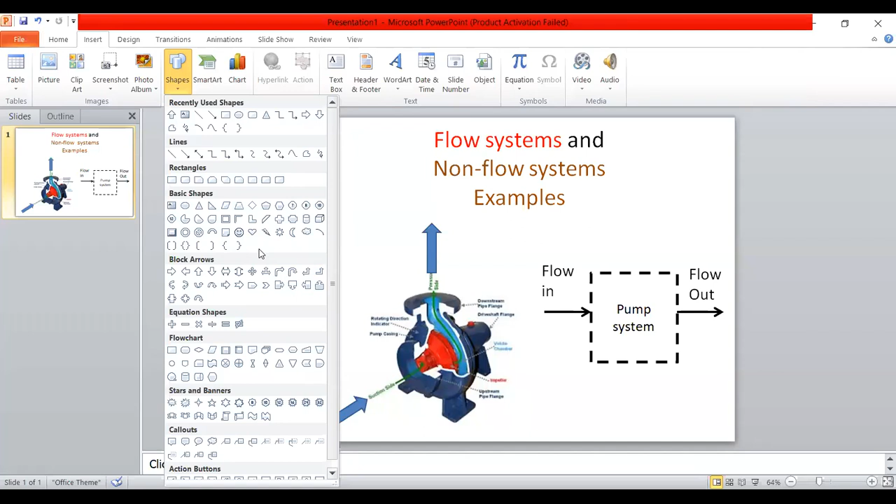Work input here, W in. I think okay, I use the same arrow, same standard. W in, okay, W in. So I just, to organize this, maybe I will put flow in here, okay, flow out here. It's okay, yeah? And this is your W in. So your W in is this. Work, okay, work in, so this is work in means this is the net work.

And you know, generally, so when the pumping is there, there can be heat generation. Okay, there can be even at a minor scale, there can be heat generation. Okay, there can be heat generation. So heat, so let me put it like this. Heat, okay, heat. Okay, so work. Yeah, and this is heat.

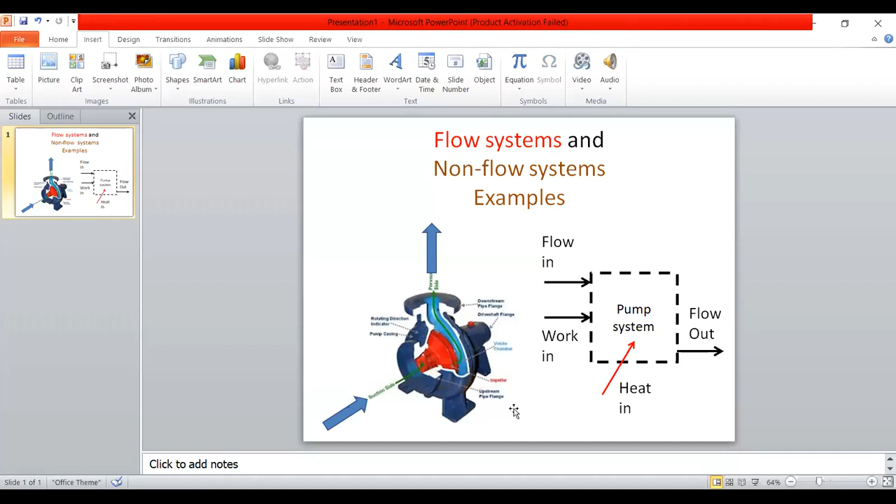Heat. So that is what we call the system. Okay, so you model this, so this is a model. So this is an actual design, right side you will see a model. Okay, so this pump system model, so this is a kind of a physical model, or thermodynamics model, you can say like this.

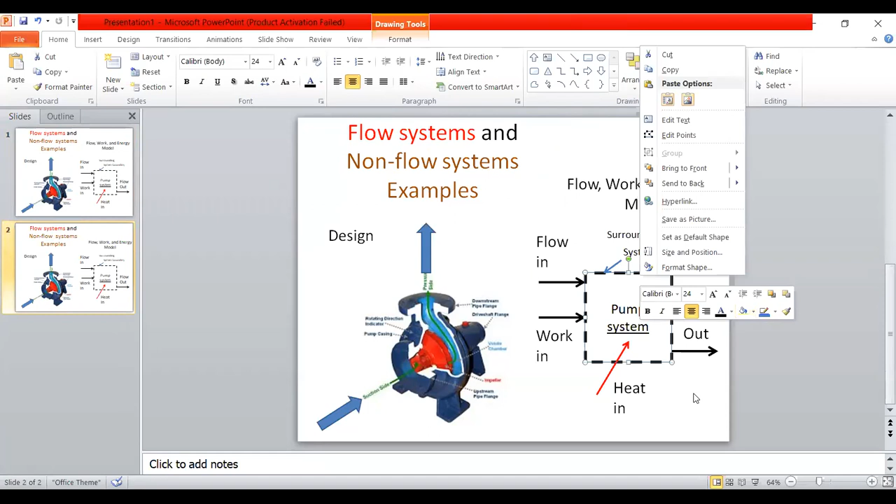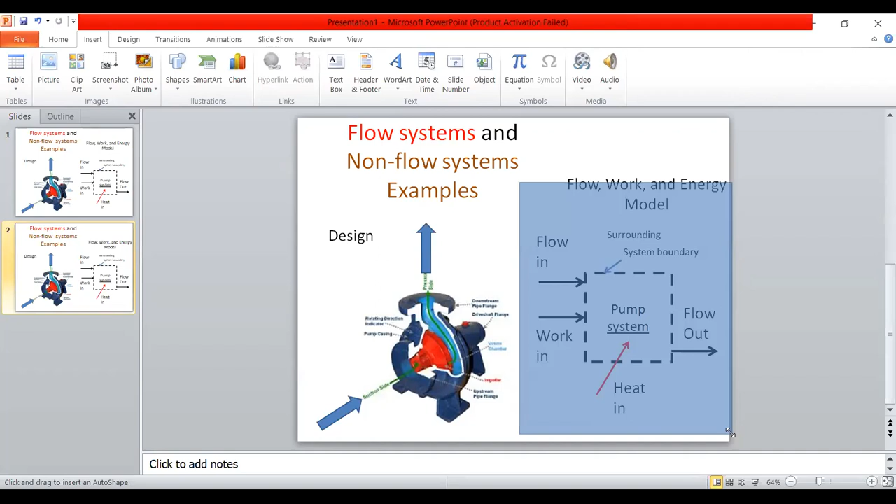So this is an open system or flow system. Let me duplicate this. I'll color the surrounding. Now this looks good, this is the surrounding, this looks perfect.

Flow in is from the surrounding. It can be a piece of pipe, but that is outside the system, it's from the surrounding. Flow out again to the surrounding. Heat in from the surrounding. Work in from the surrounding. So this is the boundary. That's how the system, when you think of the system, it is very important to feel the surrounding as well.

Otherwise, it is not complete. So system means you can think of the surrounding as well, and naturally the surrounding is considered if you think of heat transfer. So there should be two sides. If one side is the system, the other side is considered the surrounding of the system.

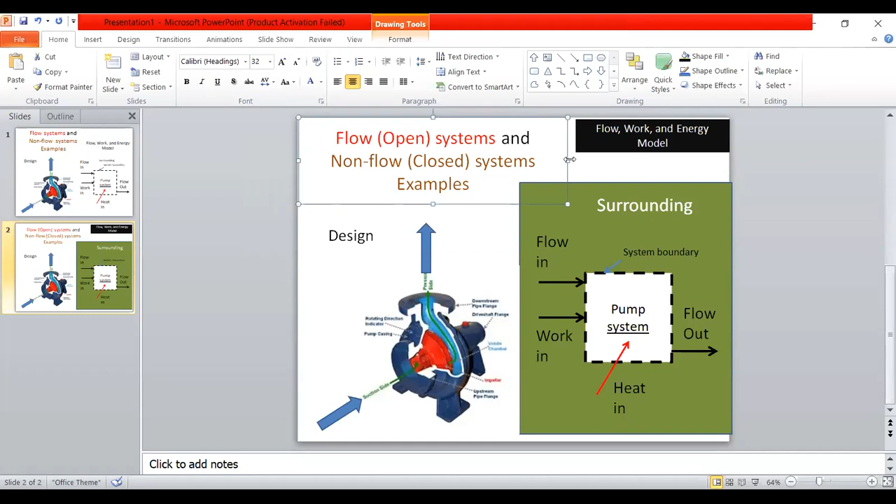Oh, sorry. Yes, good.

Yes, it's a very nice slide. Now here, the flow system example, and we will look for one more example. In future you will be learning the technologies of everything, but of course, step by step. The best is, yeah, Sri Lanka, there are pump makers, there are pump makers, but motors, electric motor makers, I have no idea.

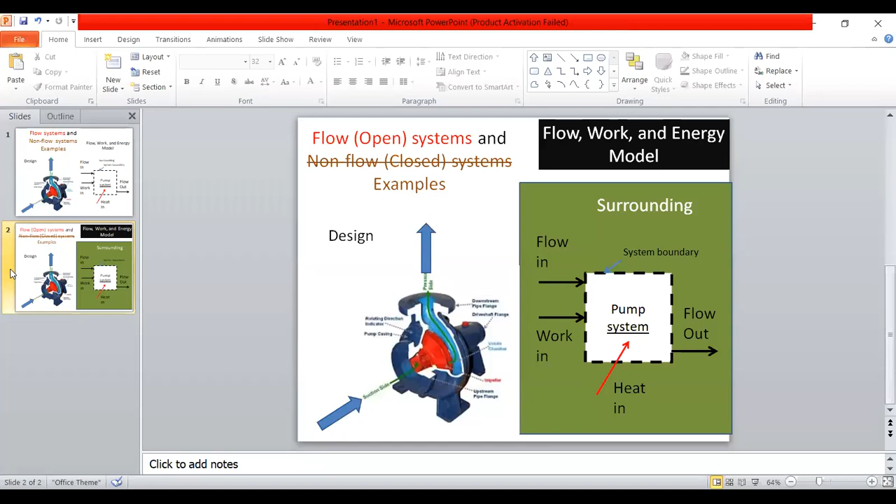There are pump makers, Sri Lankan brands. Let's see, the water pumps, we have one brand, Solex. Solex water pumps. Okay, Vita, yeah, we have one brand. Yes, we have water pumps, but electric motors we are not producing in Sri Lanka.

Maybe. So you can see how you can learn to make the pumps because you can make it. Yeah, okay, you can make it. So it's manufacturing, of course, you have the capabilities. Think about that.

Okay, yeah, and then we will go for another one. Let's say turbine, or compressors. Let's say we will look into compressors. Now these are air compressors. Let me go for a simple one.

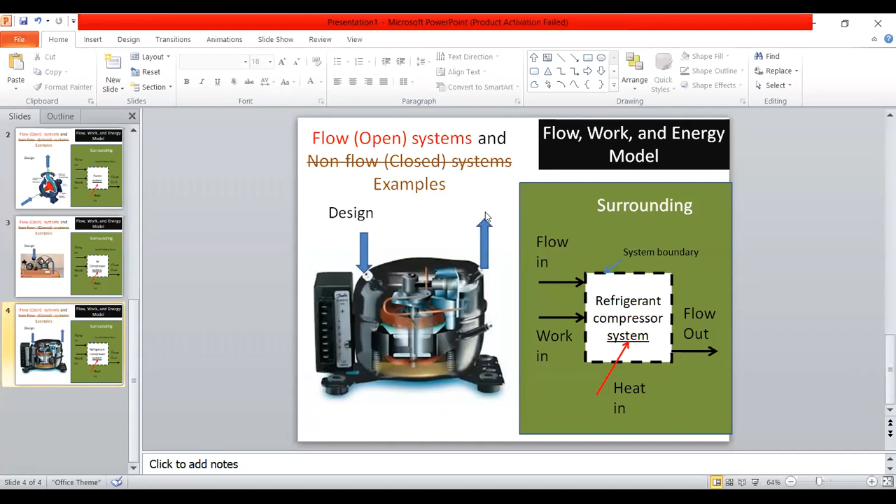So when you model this, it's like this. Again, you can see here. Work done - you can see the electric motor here. Okay, somewhere you will see this. Electric motor is there, and of course that is inside, but system means the piston cylinder is here somewhere. See, you can see somewhere here maybe. So work in is there because of the electric motor. Heat - you can see this compressor is hot when this runs. And even on this leaving side, refrigerant is quite hot that even you cannot touch the pipes. So which means the heat interaction is there as well.

Okay, yeah, so that's how it is. And this shaft, this is the rotor shaft, and oil is seen, so some lubrication is taking place. These are very nice, very precise machine designs. This is with some - this is a Danfoss brand. See Danfoss, this is with some controllers. So some frequency controllers, PLCs, to control the speed with the cooling load. So what you can see is all high tech.

Good, so I have one question not related to thermodynamics, but let's see. Air compressors we can produce here, we have a certain market we can produce, but still to have varieties of products, our market may not be big enough, local market, unless we have exports. The same way, refrigerant compressors - you have to have at least a few millions of units production to sustain this compressor making, at least a few million units production. That's why you can see these compressor makers are generally focusing on big markets. If not, it is not possible to sustain as an industry. You can see compressors made in China, made in Korea.

Maybe you are the one inventing the best one. Okay, so later you can see details of here. How from the steam, the high energy loaded steam, how that working fluid steam can deliver a good work.

Yeah, because the turbines' efficiency are also not 100%. It's around, yeah, we will see efficiency of the turbines. Steam turbine efficiencies.

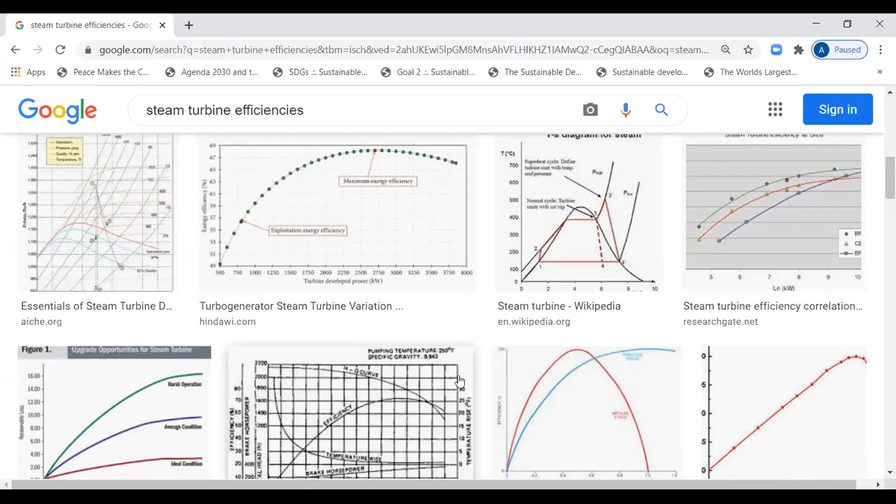Of course, those are the analysis. For the analysis, you have to look into the thermofluid. Steam turbine, so bigger ones have high efficiency. They reach top value up to about 50%, the efficiency.

So this is practical thermal efficiency of a system. Means the thermal energy out of 100, up to what level is delivered as work. That is 50%, 50% is the maximum.

Varies with the turbine size, load condition. And the gap losses means some steam without doing any work just bypasses, because there are clearances. And also friction losses. I think you are familiar with this now.

So they reach top values up to about 50% in 1200 megawatt turbines. In Norochcholai power plant, we have 300 megawatt turbines. How many turbines, how many modules? We have 300 times 3 or 4, so around 1200 megawatts.

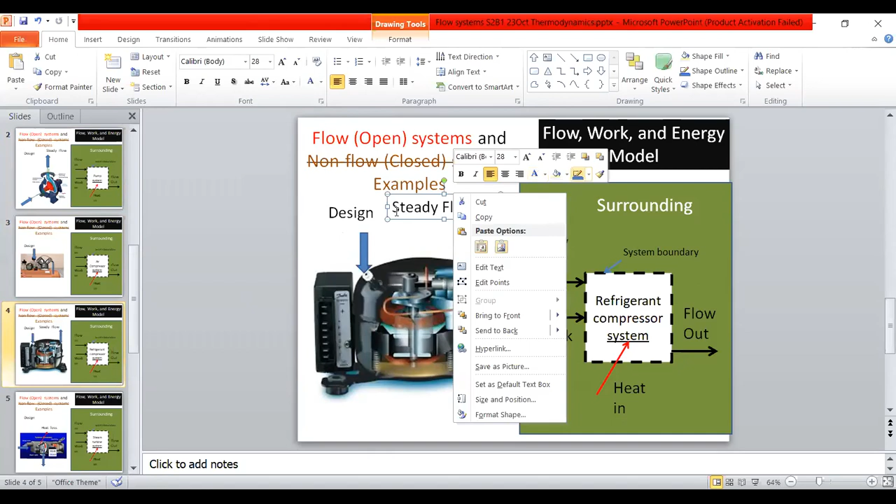I need to mention that for a smooth operation, the flow should be steady. Steady flow is important, because if the flow is not steady, there are issues. So even here, the steady supply is important. But here you can see compressors - let me take this out - not for this, but for this refrigerant compressors, again running in the cyclic operations, steady flow is important, very very important. Because if the flow is unsteady, you cannot have a very good system. Very good long-lasting system is difficult to achieve

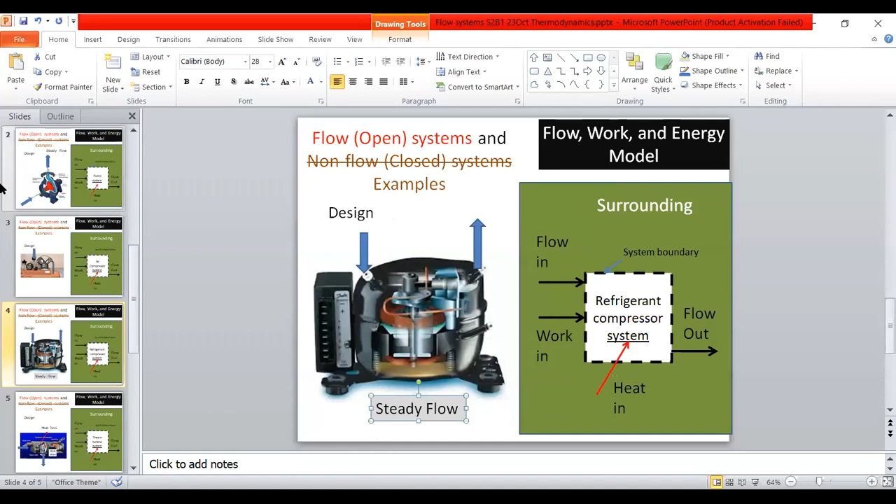if you don't have a steady flow. So the steady flowness is very important, even here, but unsteady situations also you have to analyze. Example like when you commission or when you shut down, so there should be ways of shutting down, there should be ways of restarting this. Even Norochcholai to start took I think a few days, not just one day. So the steady flow is important for smoother operations, and even for our analysis, steady flow is important.

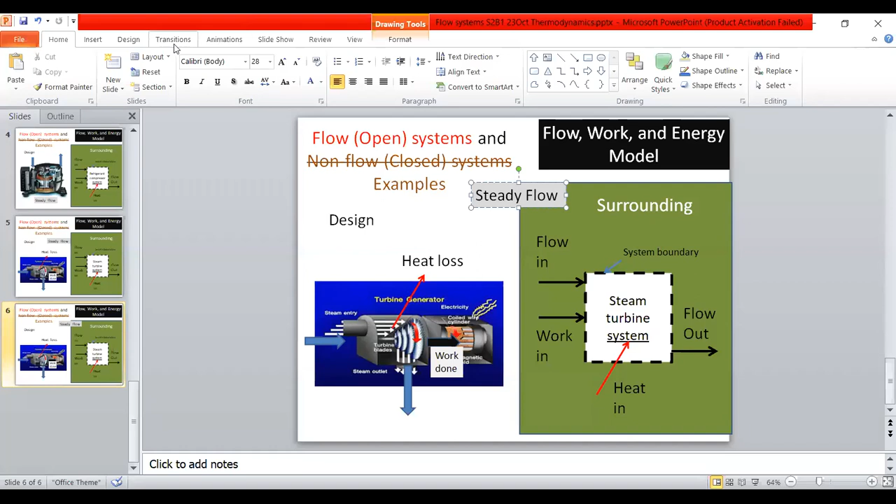So steady flow means, steady flow means what? Steady is a word, but can you feel it better? Steady flow, can you feel the word better, practically? So we can say flow in is equal to flow out. Okay, so that is the steady flow.

Are you satisfied with this? Do you feel that you have to think further on this? Are you satisfied with this? Just to get this information as knowledge of how you can feel this steady flow, that's why. So flow in equals flow out. So to further it, I would say mass - the quantity of matter flow in is the quantity of matter flow out, mass. Because flow is something matter, or mass in equals out.

So in equals out is important, because if not, within the system there is a mass, and the system mass varies. When the system mass varies, there can be issues. Then this is the steady flow condition. You can imagine a big steam turbine running - mass flow in is mass flow out. Anything short on mass flow in, if short on mass flow out, we have issues maybe. Mass flow out less, mass flow in more, there can be some other issues like pressurizing and the operational and even safety issues maybe. So the in and out has certain balances, it's a balance.

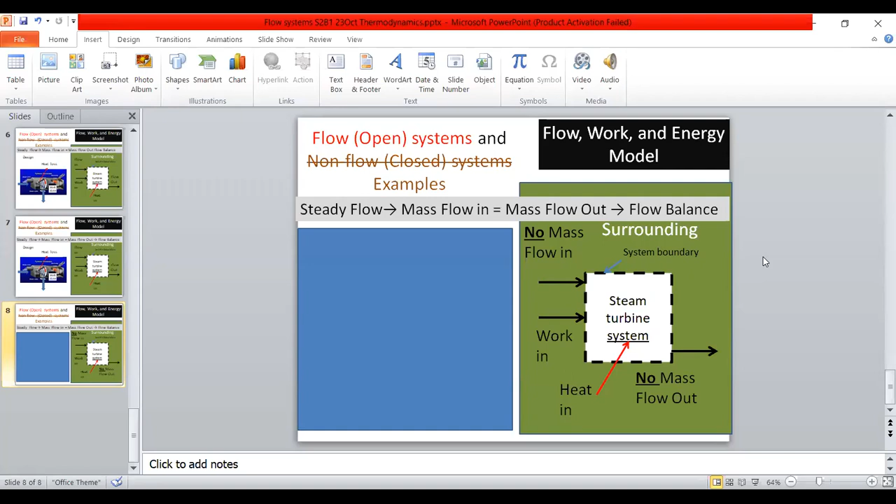Okay, so now, not about the open systems, but non-flow closed systems. So no mass flow in, no mass flow out. It's a kind of balance again. A balance. Again, it's a balance.

Mass flow balancing in a different way. No flow, that's it. Okay. No flow. It's a mass flow balance, kind of mass flow balance. No flow. Earlier one you have flow, but here no flow. No mass flow balance.

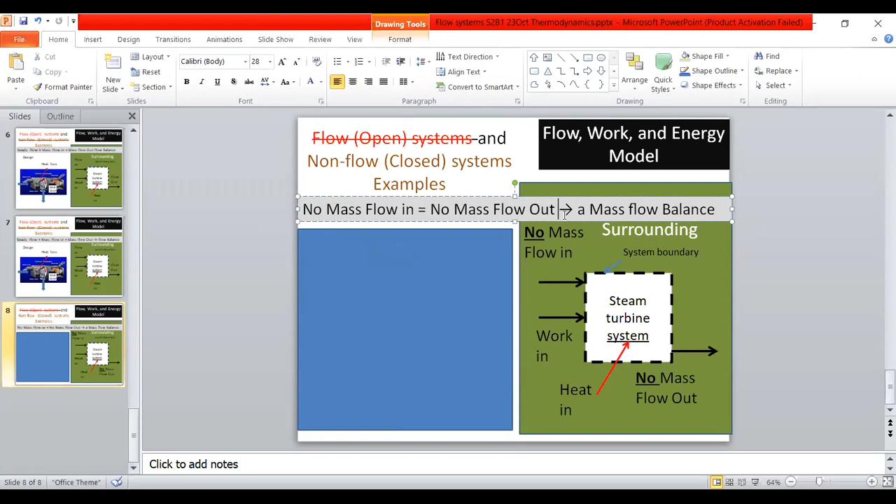Now let's say we have issues. We have issues. Example here. I open this. If no flow,

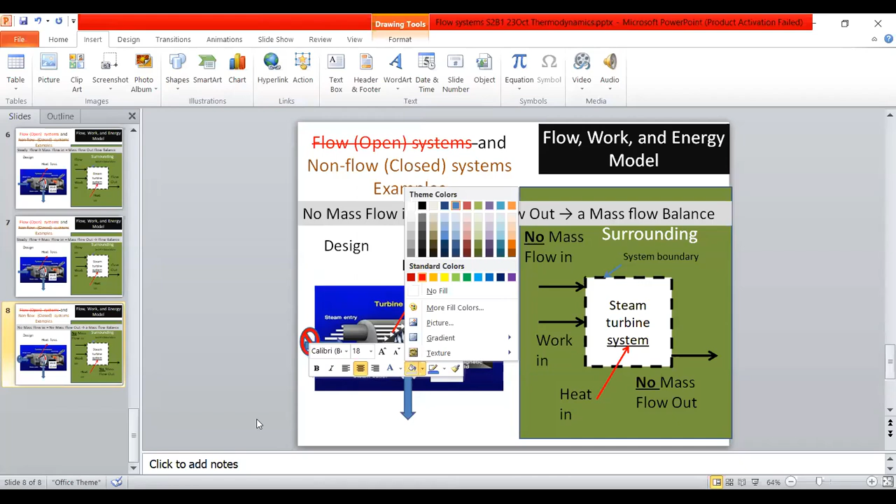no, this is the symbol. If no flow, okay, if no flow, technically, no outflow as well.

Then what happens for this case? In an open system, when there is no flow, no function. For open systems, no flow, no function. Because no work done then.

No work done. Also, no heat loss. This is a dead system, or sleeping system. So, in that case, this is not about the balance, but this is situation. Okay, this is not operating.

Yeah. But there can be systems. So this is like a dead system. There are no steam in, no steam out, no work done, no heat loss. This is like dead. This is not life. Not to say dead, but this is not life. This is not came into life.

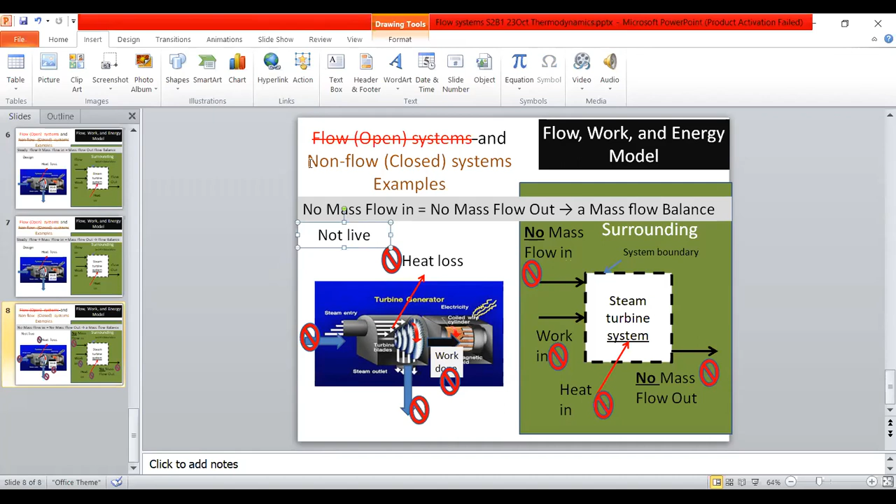No heat, no flow in, no flow out, no work in. So this is something like, how to say? So for open system, this is like not live. Well, this is not live. So I will take this out here.

This is for flow open systems, but there are closed systems with no mass in and out, but very much life. There are systems. Okay, let's see.

Now I'm going to look into, you know this situation. Yeah, you know this situation. So very nice practical aspects. For open systems, there should be a flow. Okay, there should be a flow. Okay, let's say

we will get closed system. Example. Are there live closed systems? Are there live closed systems? Yeah. Open system, when closed, it's not live. Means no flow in, no flow out. Okay, let's say example, kettle. Kettle.

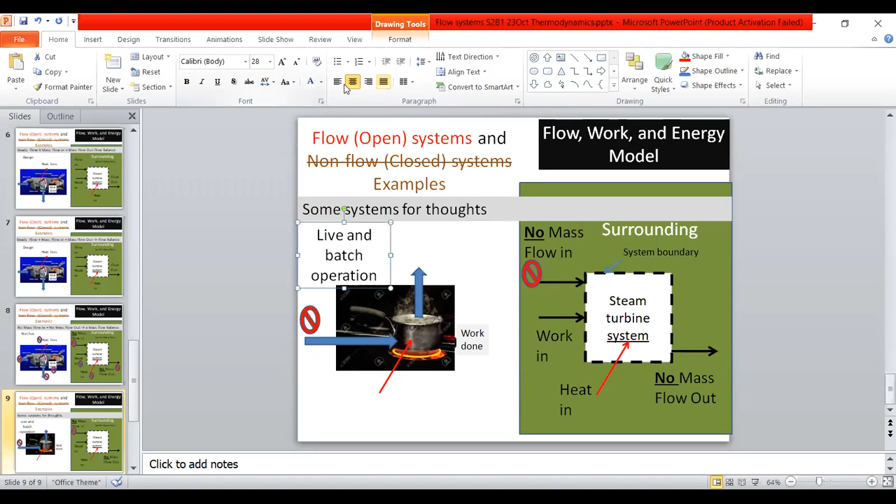In is there, but one time you put this water inside. Okay, and here the purpose is not to have outlet but to have boiled water.

So this is not important, leaving is not the point of interest. But the work done is important. Boiling can be a kind of work done. It is there. So, live system, some systems for thoughts, live and batch operations.

This is operating as a batch. One time you put in here, almost no out, little out, work done is there, heat is applied.

So this is not an open system. This is not open system, and also this is not a closed system. But we should be able to analyze this. So this is a system. Okay, but this is a system. You can imagine some boundaries. So this is a system. Okay, don't worry about this.

If you think of boilers, industrial boilers, industrial boilers. I'm looking for a simple one.

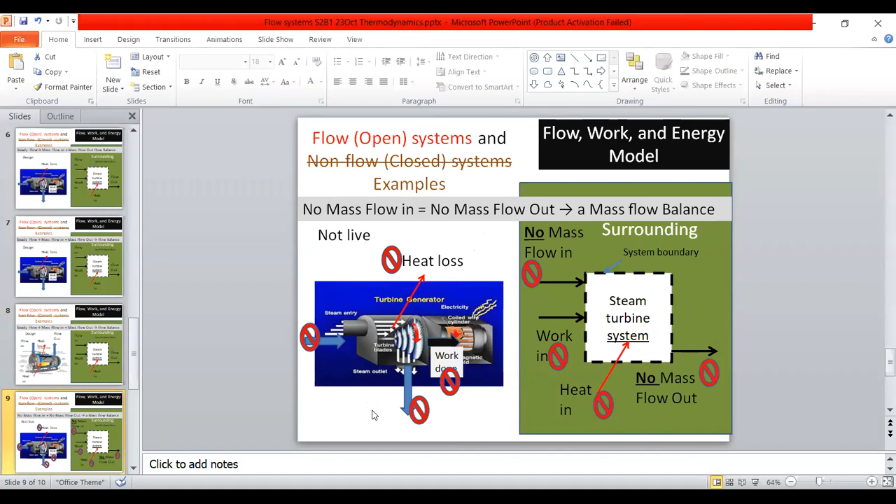So this is the situation when the flow stops of the steady flow. The system becomes not live. So this is a complicated one.

This is live and batch operation. During the operation, no in, but there is an out. Yeah, so work done, sometimes the lid, you can see jumping and we have some noises and all.

There can be. Okay, the heat is there for sure. Net heat, so there can be heat losses as well. So net heat is there. So don't worry about this complicated system. Later we will start. So this is not our interest at this time. This may not, sometimes maybe.

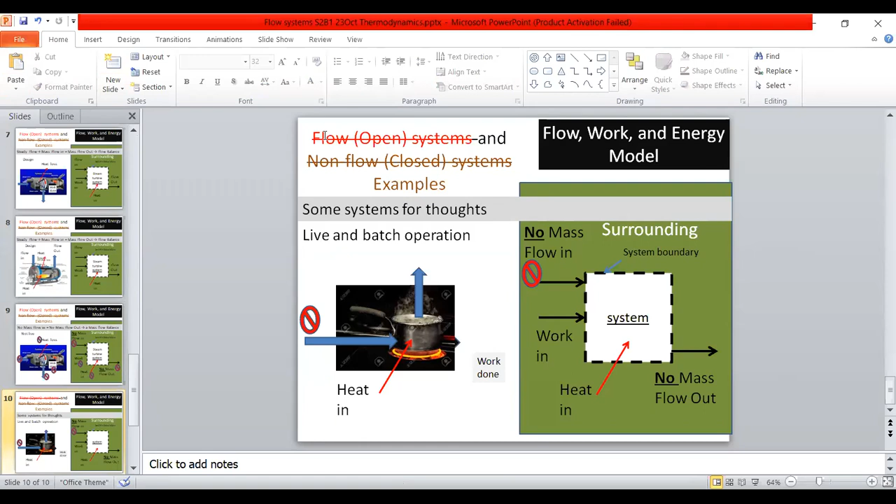So our interest is this one. Okay, open systems with steady flow. Okay, steady flow open systems, that is our interest. Steady flow open system is our interest. Steady flow open system is our interest. Okay, steady flow open systems.

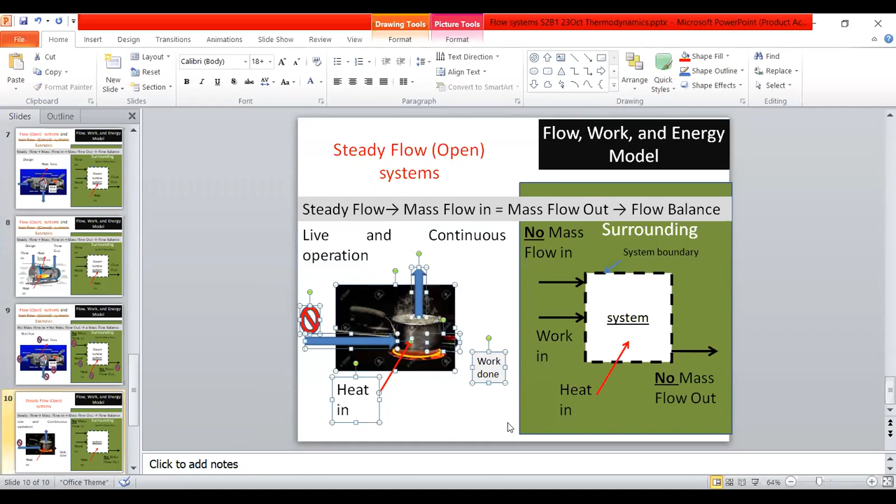So here in this case, steady flow, there is a flow balance. Okay, and live and continuous operation. Continuous operation, not the batch-wise. So this is live and continuous operation.

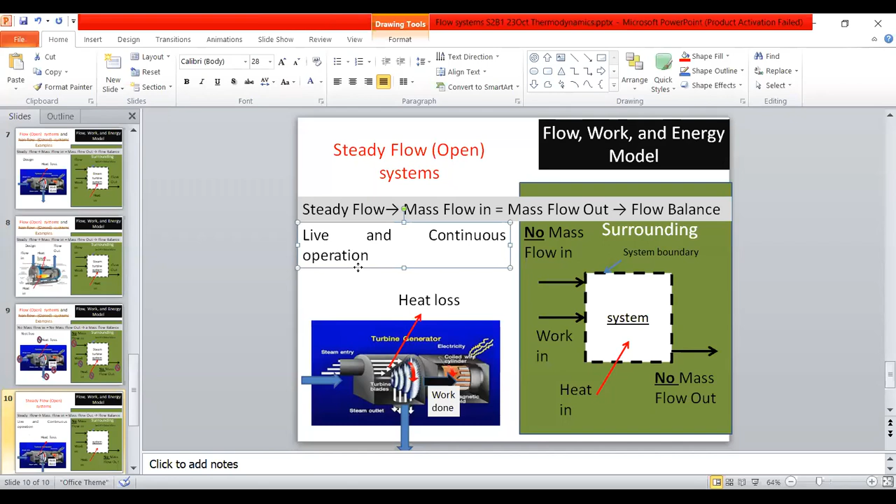And if you need an example, this is one example. Okay, this is one example. Okay, live and continuous operation. This is the situation, right? Continuous operating systems, we are going to study. Okay, this is the one we are going to study.

Okay, steady flow open systems. What we are going to study is the flow, work, and energy model. So flow, work, and energy model we are going to study. The flow, work, and energy model. This is what we are going to start here.

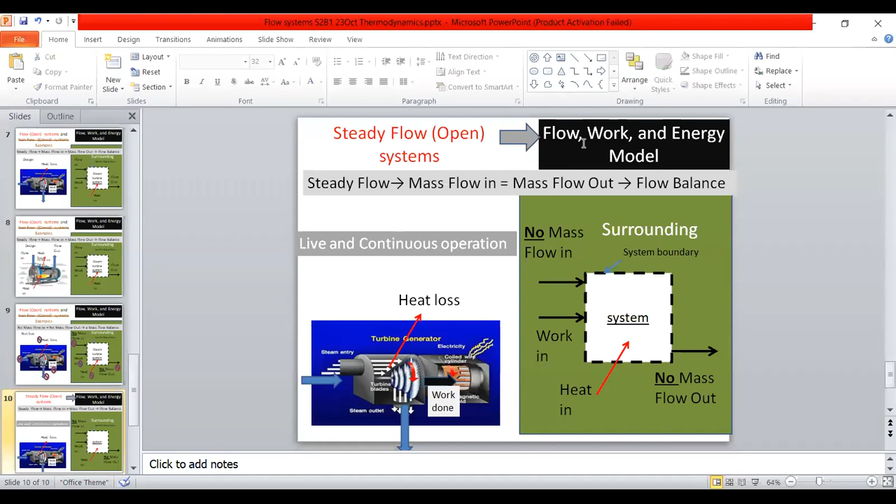Yeah, very good. Flow, work, and energy model. So steady flow, very nice. So model for steady flow. Okay, this one. So when you learn this, the outcome is, of course, for live and continuous operation. When you model this, okay, let's see how the model would be. Let's see how the model would be. It's very nice. Okay, energy, work, and flow model.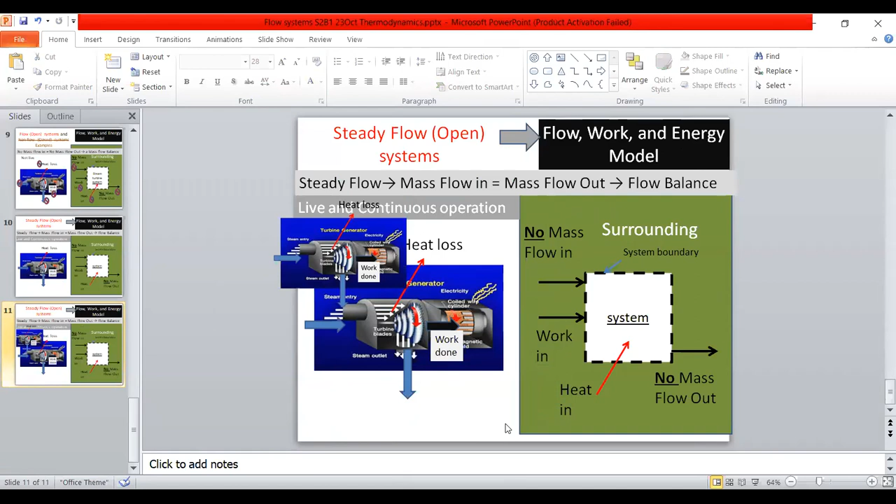Something like this, yeah, something like this. So we are going to model it now.

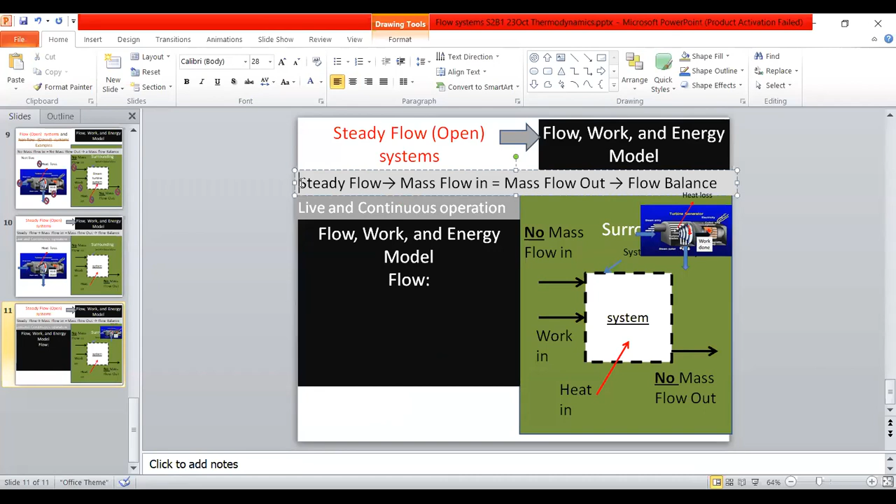Okay, steady flow. So let's say now steady flow. Steady flow energy model. Flow, work, and energy model. So be quite patient with that. So this is the condition, the flow, work, and energy model. Flow, steady flow, okay, very simple.

Work and energy, yes, then that one. So work and energy, work and energy model, so all goes together, work and energy, quite interesting, work and energy. Let's say what you're talking again, a balance.

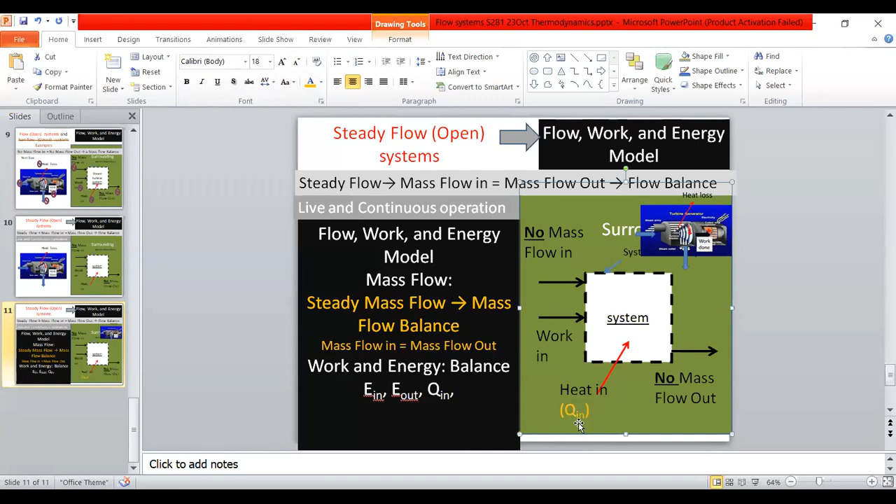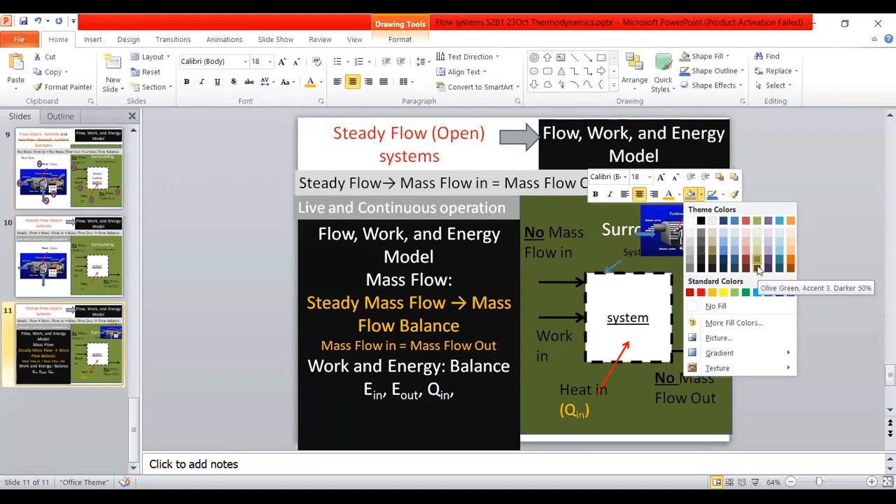Heat, so heat I will use Q, Q in, Q is for heat, heat in I will put as Q in. Okay, Q in, you can say this Q in. And E in is together with mass flow in, see E in. Okay, so not no mass flow in, but yes, there is a mass flow. Okay, and there is an E out together with mass flow out. Okay, there is an E out. Together with mass flow in, there is an energy flow in, E. Together with mass flow out, mass flow out contains energy. That is E out.

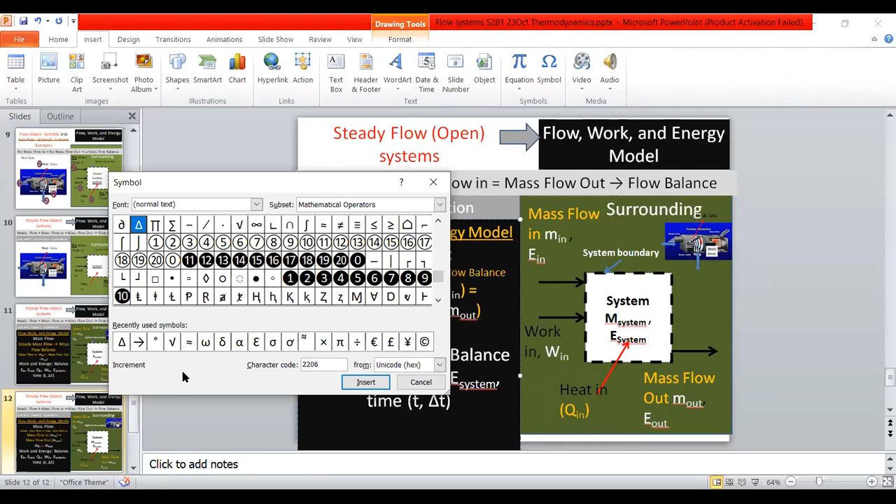M in equals M out. This is the mass flow balance equation, not to say equation, but that's how the steady flow works. Now if we look into the balance of work and energy, if we combine together, we are about to write an expression.

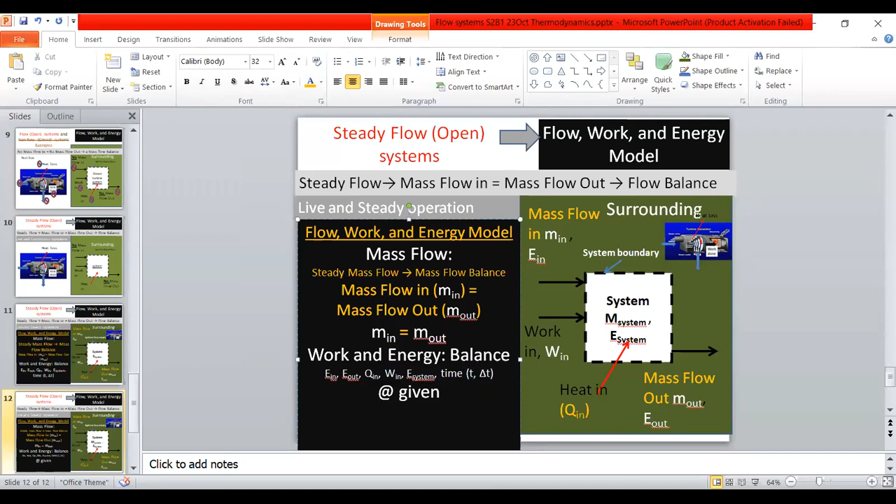Let's say we need to consider timing, given a period of time, because flow in has a certain timing. I use delta t. It's like starting now, 10 minutes, delta t means 10 minutes. It's a difference. Or even let's say I will put 10 seconds for your convenience. Later I will change. At a given time of, let's say, 10 seconds.

There is a flow in, E in, there is a flow. The flow together with energy flows with mass in. And work also, once work is done on this working fluid, because of this W work, the energy level of the fluid increases.

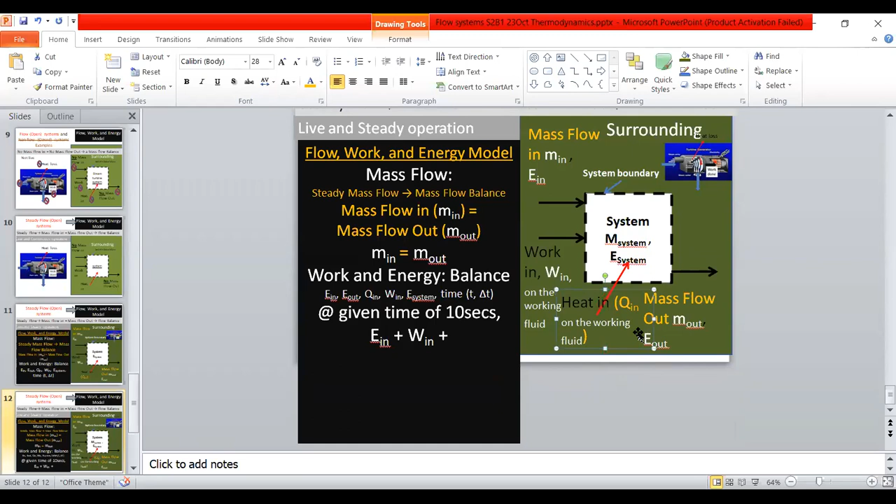Work done on working fluid. So W in means it's on the working fluid. W in on the working fluid. Heat in on the working fluid, because all are performing on the working fluid. Then it's more meaningful, right? On the working fluid.

So let's say heat in as well, we call it Q in. So these are the ins. And be very thoughtful, because I'm typing on behalf of you, you have to just see and have some understanding. Minus out, okay, for 10 seconds, E out.

Out is only with this. W means actually W net, there can be some in, some out. So we can say everything together in, this is net, actually net in. In the net value. There can be out also, in minus out. It is net. In net value.

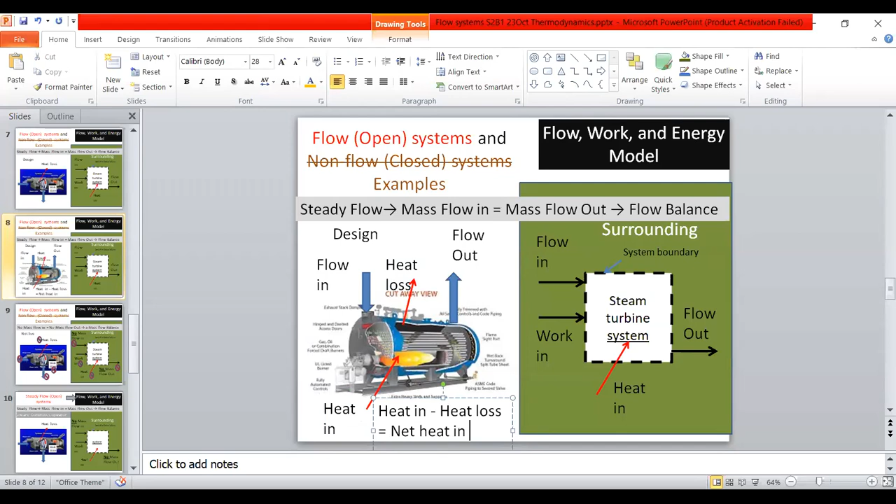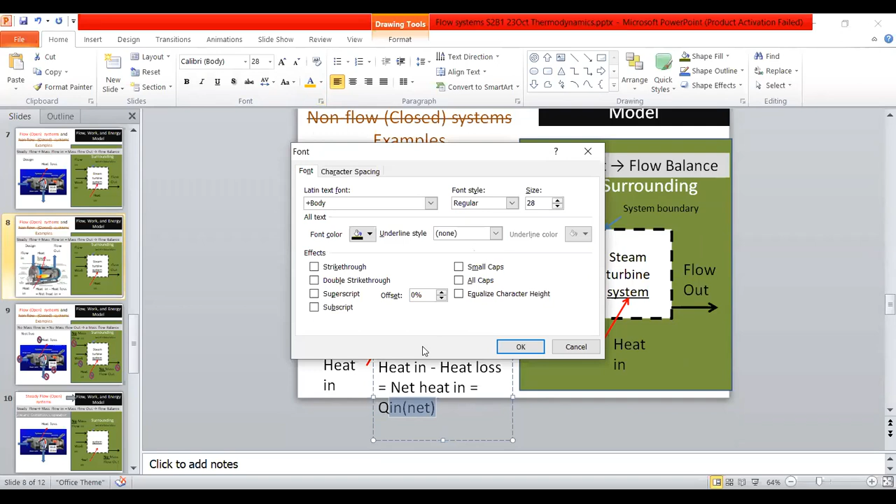If I write it something like this: heat in minus heat loss, that is net heat in, that is Q in net. Okay, that is what we call Q in net. The best example is the boiler.

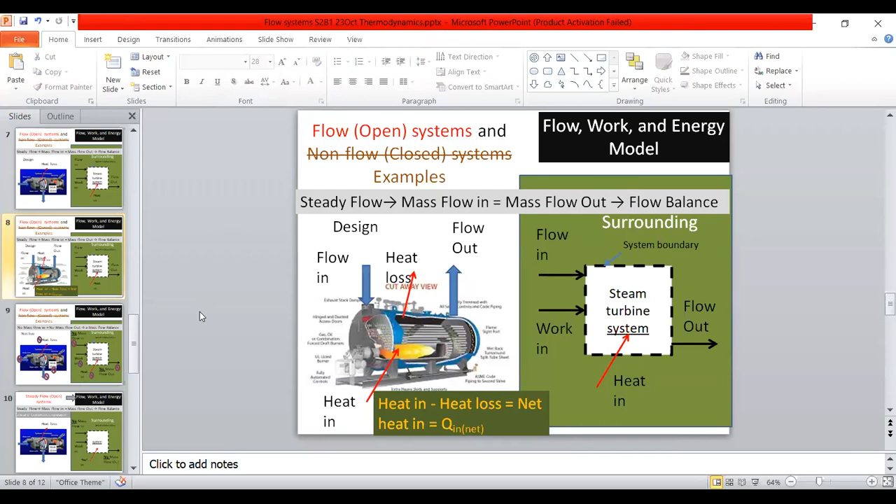There you can see it. So you can see it here. Q in net. Same way, in some cases, there can be W net as well. That's why Q in net, W in net, and E out.

So let me duplicate this slide. And for this step, I take net out because even though net is there or not, that is net. So I can take this net word out. Understand? E out, it's only one term, so I take the bracket out. Is equal to what?

Now for 10 seconds, certain energy into the system, certain work done on the system, certain heat into the system. And with the flow out, there is a certain energy leaving from the system. So energy balance is what? E system. I know that you have an issue here. E system, I have to bring this delta here because it should be the delta E, or rise of the system energy.

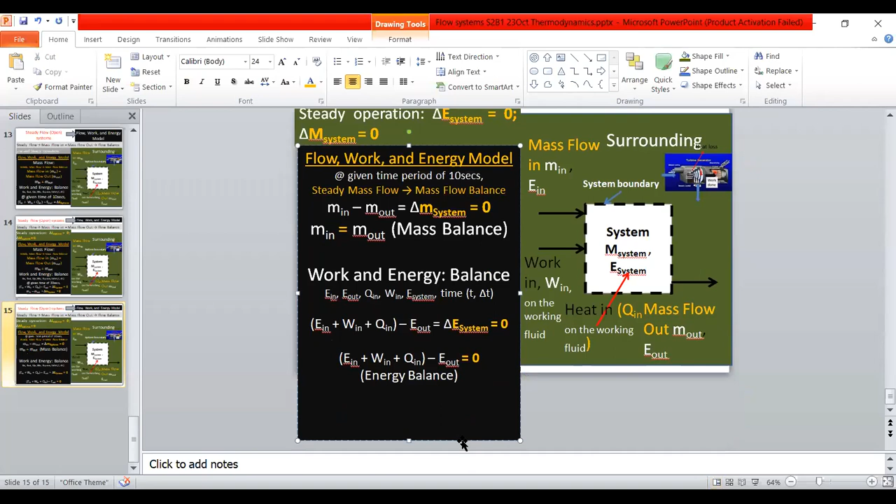So mass balance and energy balance, the work and energy balance is there. Don't worry, I will take this out. So work and energy balance, and we call this energy balance. Okay, mass balance, the other word is conservation of mass principle. You can see in your textbooks, my notes, you will say this: conservation of mass principle.

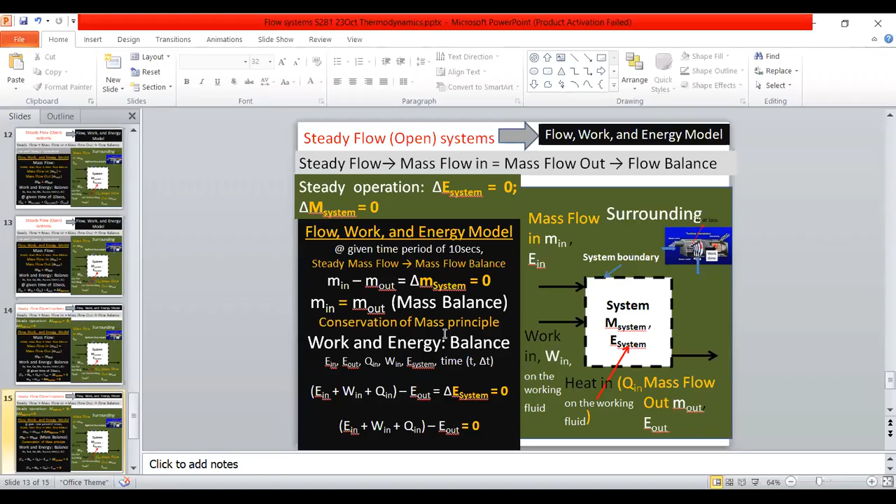Conservation of mass principle. The other one we call work and energy balance. We can call it conservation of energy principle. So let me find here. The work and energy balance is conservation of energy principle.

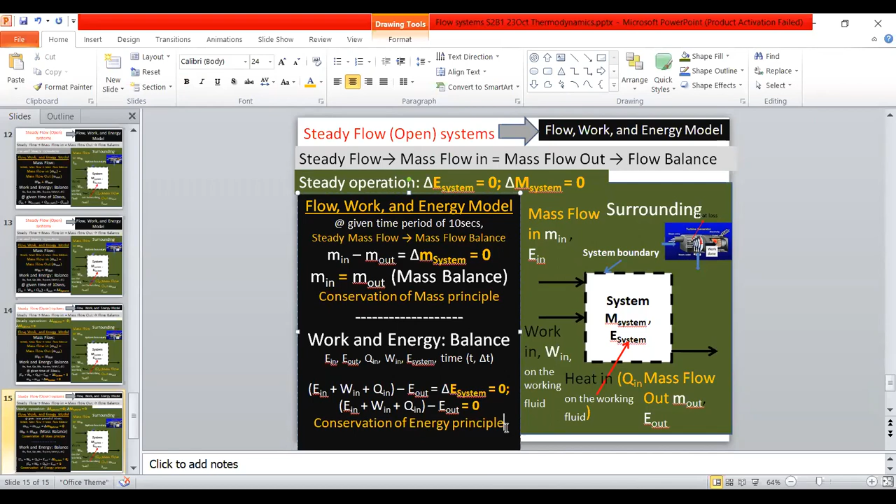So I'm looking for some space. Okay, good. Conservation of energy principle. Very good. Okay, so this is the modeling of steady flow open system.

So in the steady operations, we should look at the system. That's why I feel it is very important to highlight this. I will highlight here itself. Steady operations means the system should feel the steadiness. How does the system feel the steadiness? By feeling that nothing changes, system feels nothing. The system is there, it has no much impact, no feeling. The system feels steady. Steady means no change of energy levels, no change of mass levels. So that is the very important point when it comes to the term steady.

Okay, so steady system operation, that is very important. Yeah, so you can imagine from here we should start from the system. This is very nice. So a steady system operation, that is very important. Other things are also important.

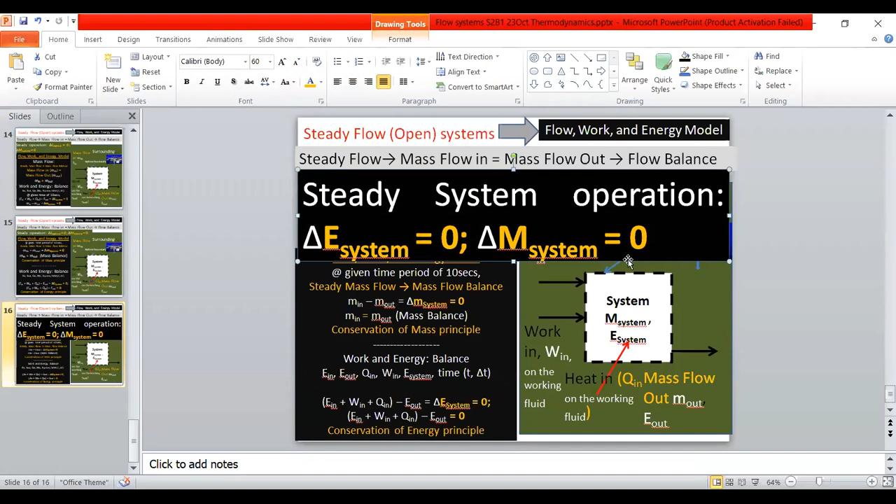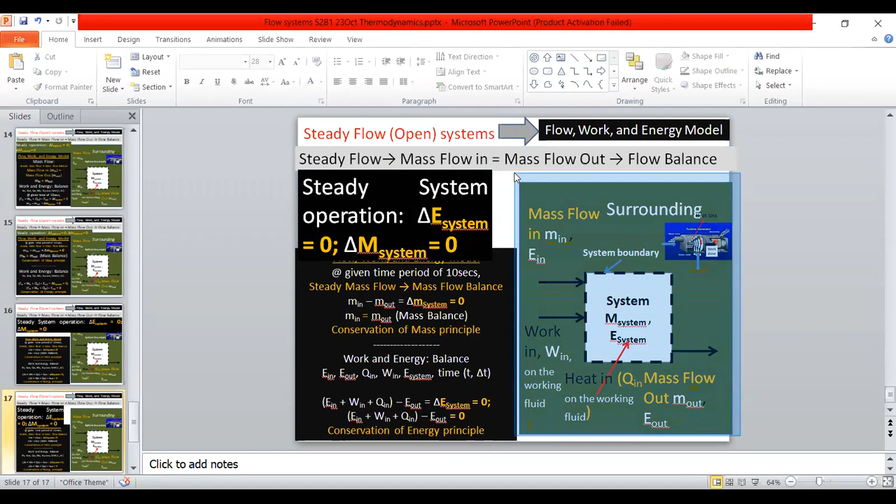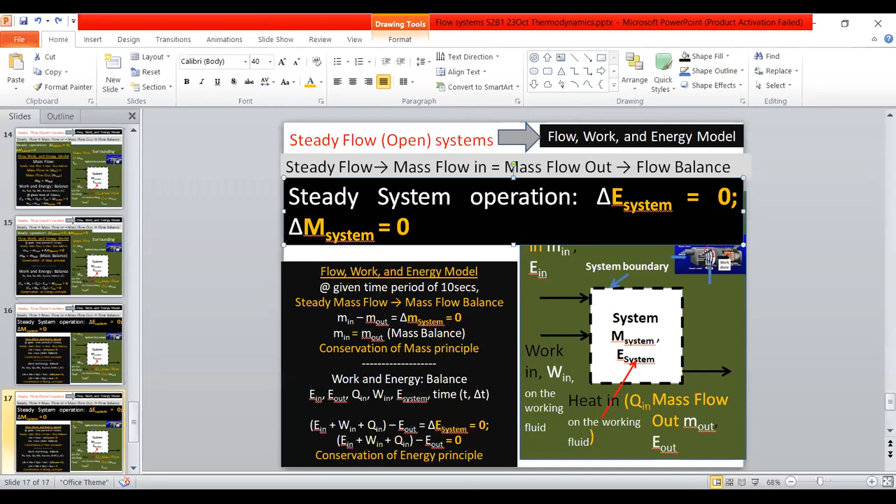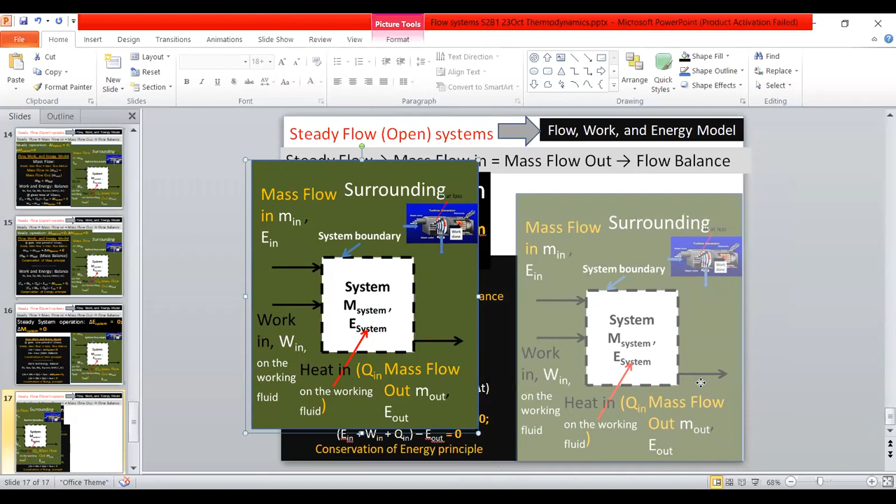Yeah, this looks okay. Duplicate this. This looks okay. Good. So this is the summary.

Open flow systems, it is something like for the working fluid, there is some in and out, energy and work interactions, but the system should not feel the change of the energy and the mass levels. That is what we call steady. So no change of energy levels, energy in total: energy in plus work in plus heat in minus energy leaving. Of course should be 0 because no energy level rises in the system.

System feels good and steady. See the beauty of that. And mass-wise, mass comes in, goes out, but for the system no change. So mass in is mass out. So for a steady system, what does steady system mean? No rising or changing of energy levels, no rising or changing of mass levels. That is the point, the steady flow system. Okay with that? Yeah, so that is very good.

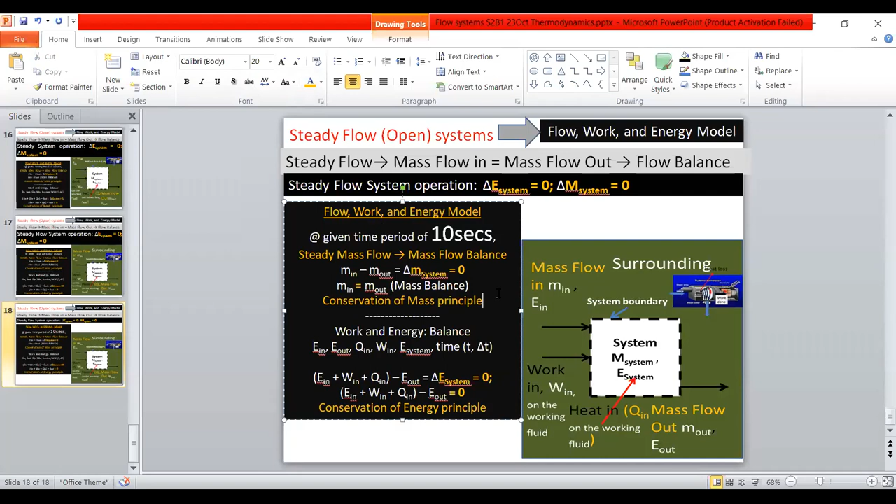Now here, previously, at the given time of 10 seconds. So maybe this starts at 9 o'clock, same as our lecture starts. So starting 10 seconds means 10 seconds past 9. Let's see this one as 30 minutes. So 30 minutes means starting at 9, and 30 minutes past, now the time is 9:30.

So this lecture time can be 9 to 9:30, or even 9:30 to 10, also possible at a given time. Or any starting time, even 12 to 12:30 is okay. So given time, we can consider it as a difference in time.

See, 9:30 to 10 is 30 minutes. 9:30 minus 9 is 30 minutes. So time minus time, this is the time change. That's why in the time I put both here, T and delta T. Time T and delta T, I put both here because of this reason.

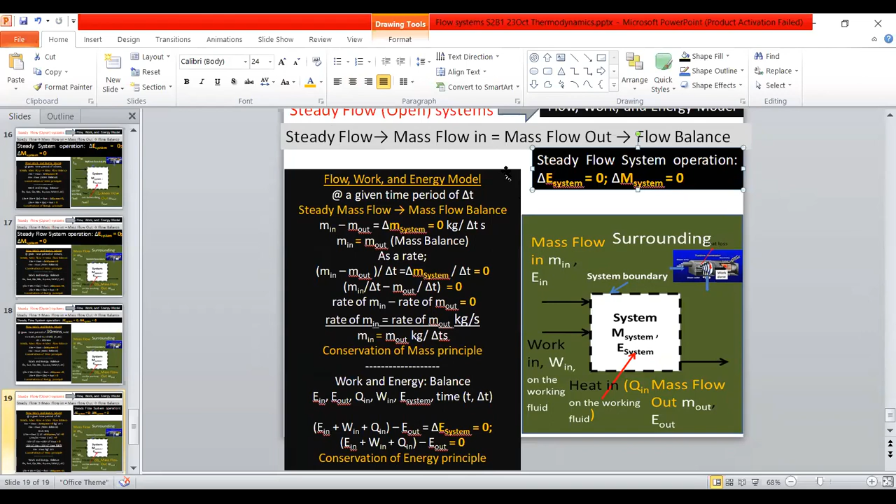So here the unit is kilogram per delta T seconds. So you should understand the importance of time. Rate is more comfortable and more useful - kilogram per second. This is the initial one, that is also okay for delta T seconds. Good, same way.

For work and energy balance, you can write as a rate: rate of E in, rate of W in, rate of Q in, minus rate of E out is 0. As a rate. So here the unit is, let's say, kilojoules per second - same like in the steam tables, you have the kilojoule unit. So I put here kilojoules.

We have 10 more minutes now. And now I'm going to further simplify this. Steady mass: rate of M in equals rate of M out. And let's say this is M dot - very nice notation, M dot, kilogram per second.

So rate normally we can use as M dot. Rate of E in - so you can use this as rate of E in. Let me write E dot. So E dot in is E dot out.

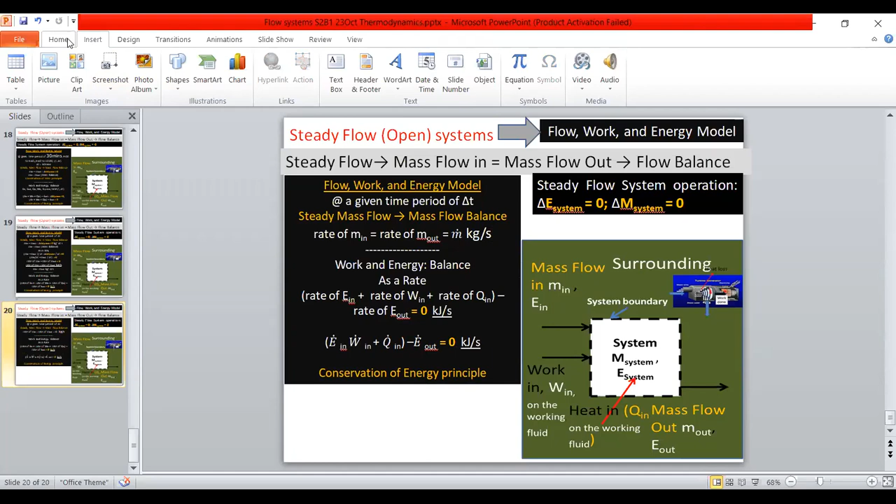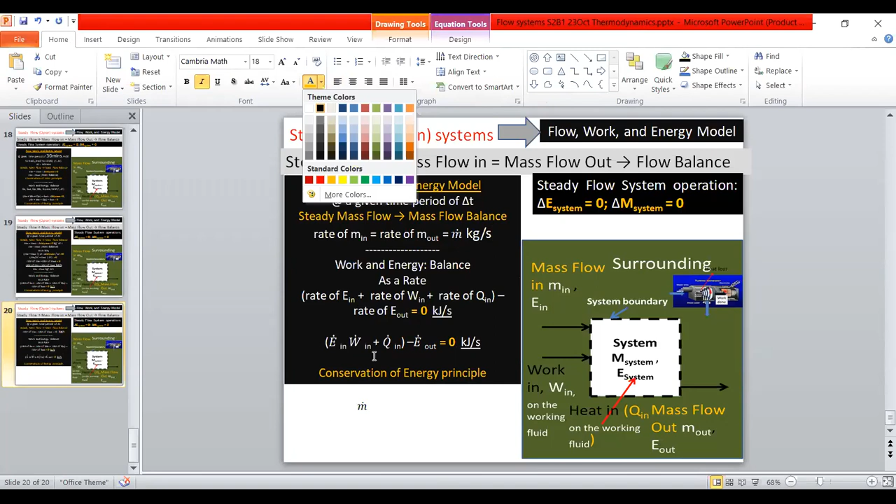So M dot means this is mass rate - M is mass, dot means rate. So this can be the mass rate, here it's a flow rate. So it's very nice notation, don't worry about this. So if you think of E dot - again, something like energy rate, for sure.

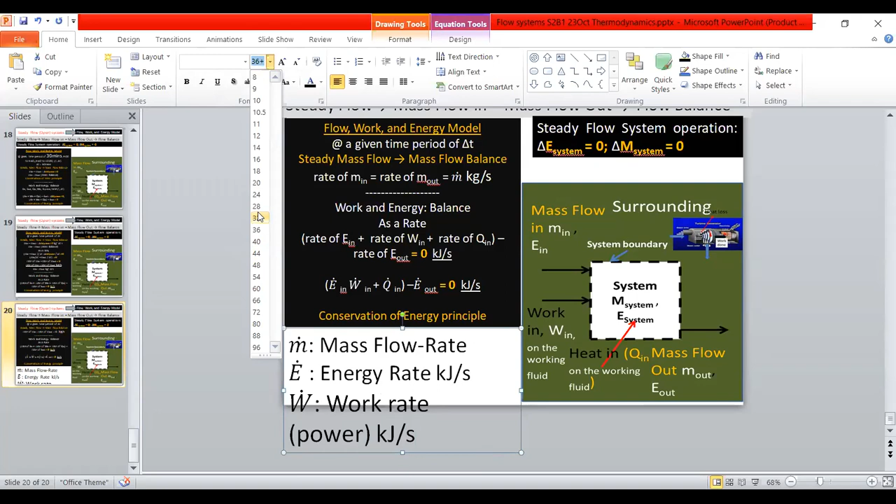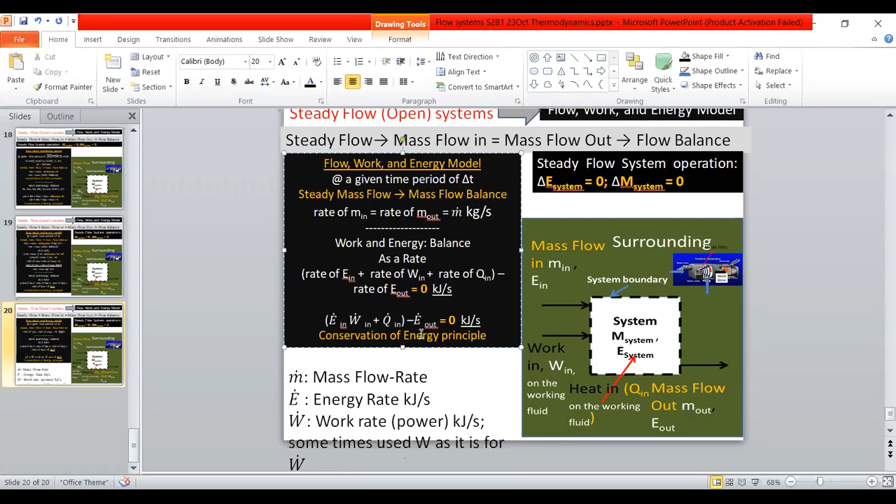So this is quite interesting. But in some cases, instead of W dot, people tend to use normal W as well for work rates. Sometimes for W dot, people are using W as well - so don't worry, sometimes they use W as it is, it is for W dot. So don't worry about that.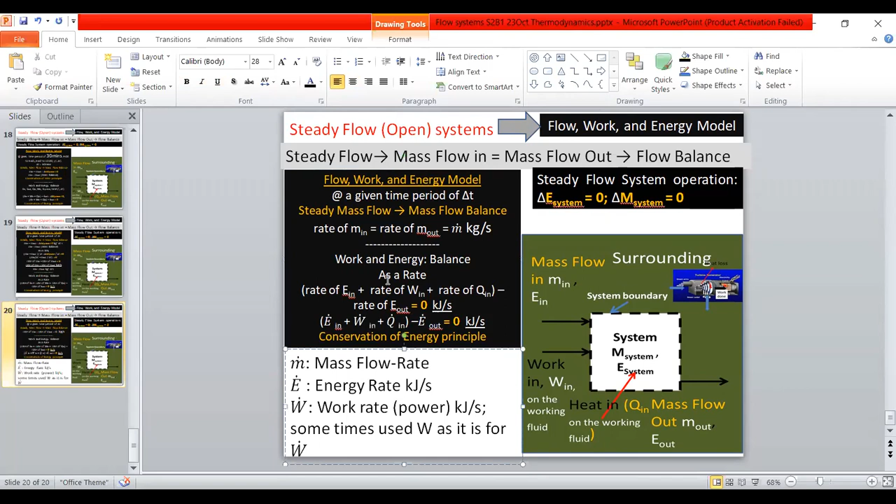And if you have time, let's see if we take one more here. Some more interpretations can be in this way. Rate of E in, rate of W - this is fine. Sometimes you can see E in. If this is okay, you can write this way as well: by M dot, E out by M dot. So kg per kilojoule per kilogram per second - now this is the unit.

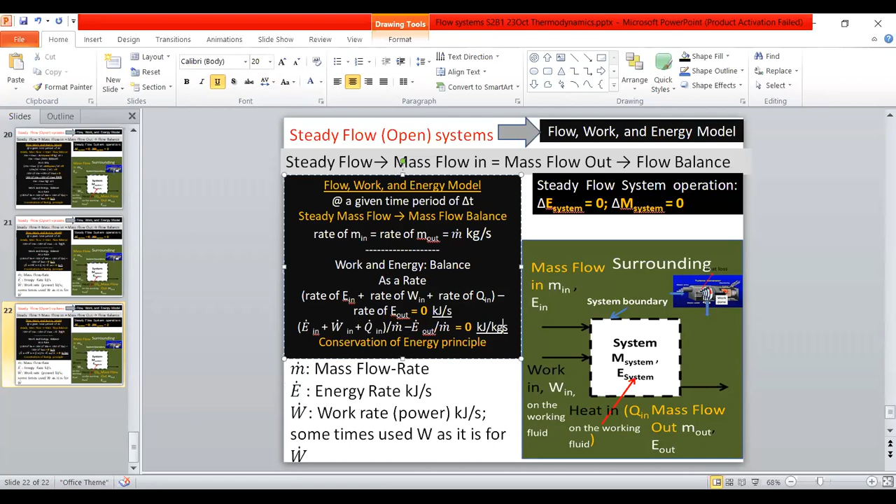So this can be written as, instead of big E, you are using small e. Big W, small w. Big Q, small q. And then no M dot is here. So here, instead of big E, small e out is there - kilojoule per kilogram per second. So that is another interpretation.

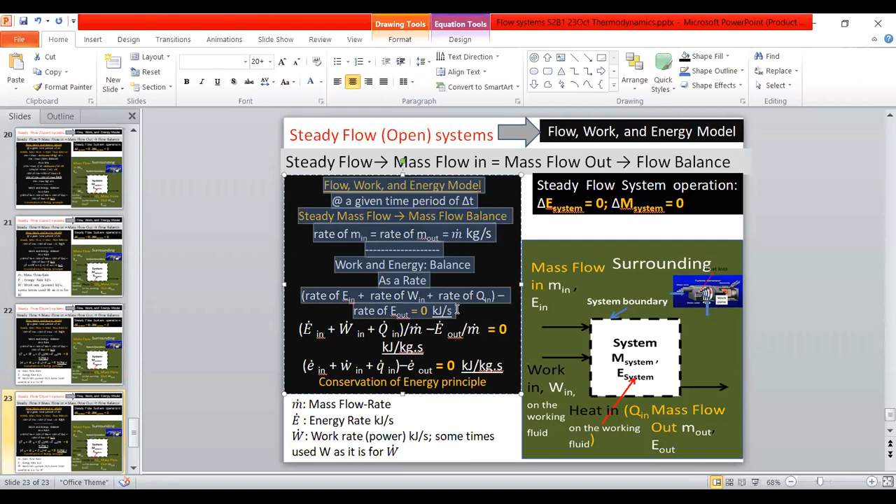Next week we will try to drill this one some more. So today even you can look into your textbooks, notes - it's mentioned all the things in different but easier ways. So next Friday we will do some more analysis on this. This is not the final form, because for next week we should understand these things: what E means, how to write E, understanding this. Understanding E and E dot - we have to understand this.

Now, so given understanding the big E's - yeah, so to understand this, dot, also understanding this one. Okay, these are the two important things. So, understanding this.

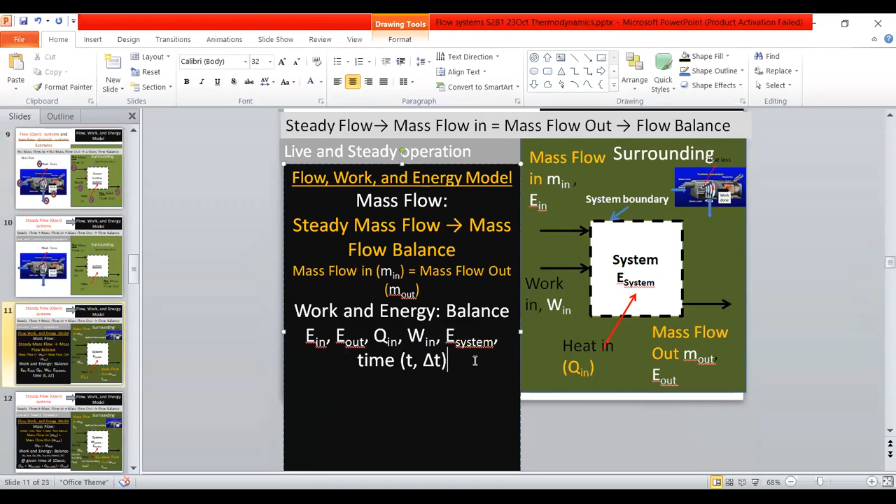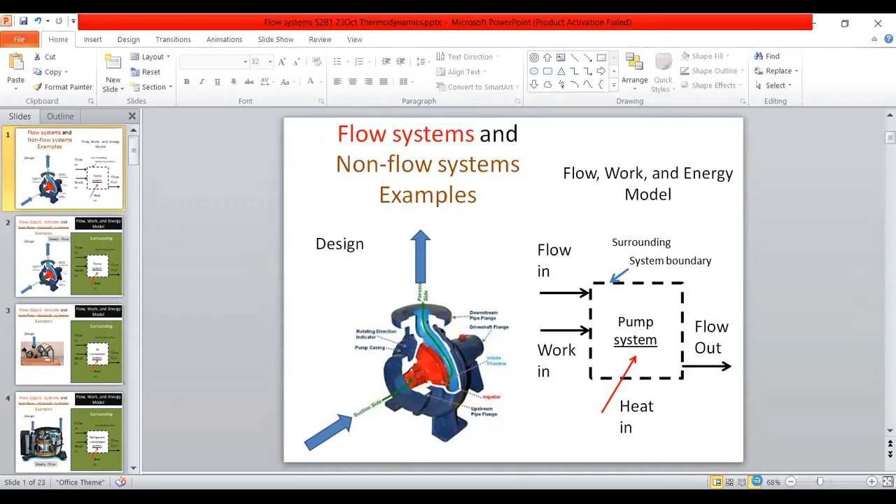If you look into the summary, this is the starting flow work and energy model with some case studies here. This is a pump. The model again, we recognize the surrounding system boundary and the system, and the flow in, flow out, work in, and heat in. Work in means net work, heat in means net heat.

Here also it's the same. Open system, flow in, flow out, work in, and also we consider heat in. Heat in and heat out, both we consider: heat in minus out, just put here. For example, 10 watt in, 2 watt out means a total 8 watt in, that is heat in.

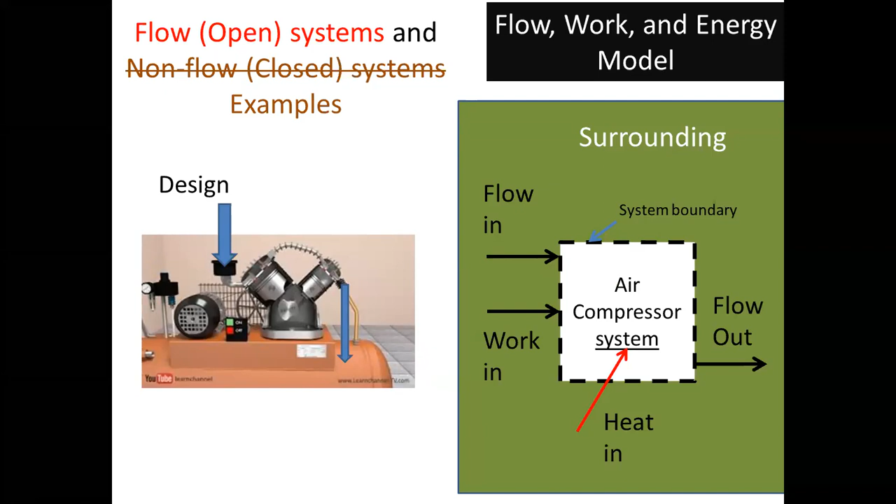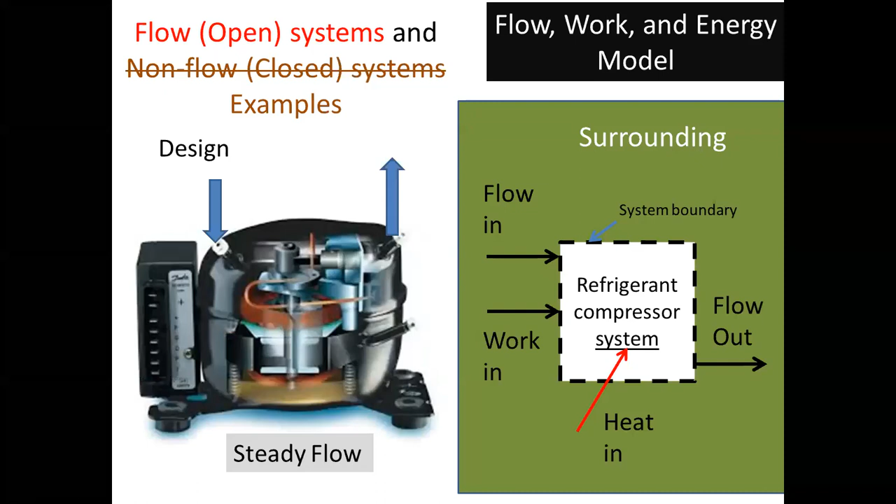Okay, Buddha. Okay, yes, Sanjeev sent the message.

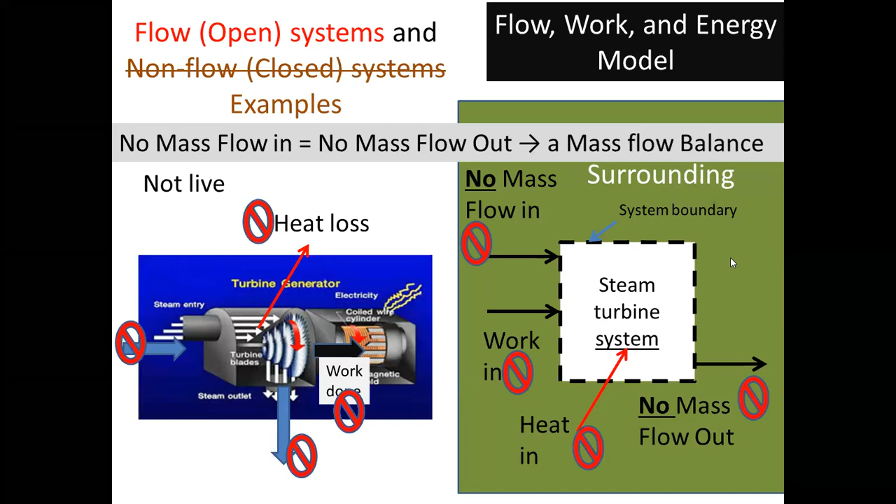So consider flow balance as the steady flow. Then boilers, okay, we introduce. And the flow system, if no in and out, it is like not live, okay. So no mass flowing, mass flow balance is there, but that is not a live system when it comes to steady flow or the flow systems.

Okay, the live and continuous or steady operations. So here flow balance, we wrote equations, work energy balance, we use the keywords here, just put the keywords on, and slowly, for 10 seconds, we wrote the expressions. Okay, and then some more.

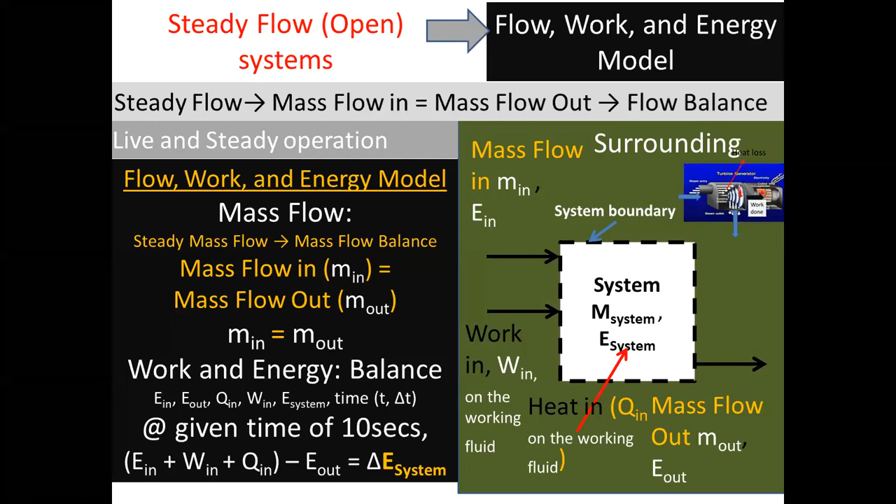About this energy balance and the mass balance, and further continuation of this. And then we have introduced what steady operation means: delta E system zero, delta M system zero. And the steady flow means this really. The relevance is for the system. So steady operations, steady systems.

So steady flow system, yeah, very nicely introduced. The equations are here: E in, W in, Q in minus E out equals 0. Net in minus net out. For M in equals M out, mass balance for 10 seconds. So then we...

Came to know the concept of delta T. So 10 seconds or 30 minutes, so delta T we have. And then same expressions for given time delta T, as per kg per second or per kg. So M in equals M out, kilogram per delta T seconds. Rate of M in, rate of E in, rate of W in, the rates introduced.

Then rate of M we introduce as M dot. Rate of energy we introduce E dot. Work W dot, but W also, okay, we can just use W as well. Q dot, okay, actually heat normally supplied as a rate. Later we will see, okay, don't worry.